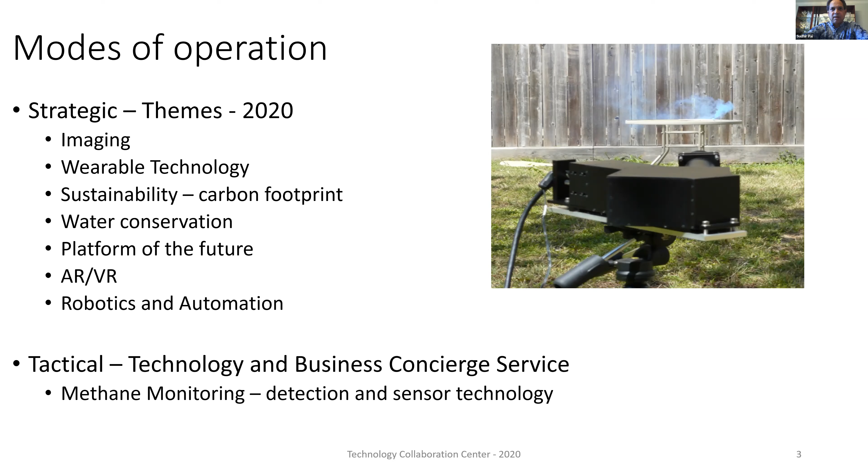I'll quickly zoom into the main point of today's discussion. A lot of the rest of my talk is going to focus more on robotics. I have two lovely colleagues following my talk, Jamey Jacob and Bob, whose talks focus more on robotics, aerial robotics and drones. So I won't steal their thunder, and I'll focus more on the other parts of robotics.

Here's something interesting about today's topic: history, where we are, and where we want to be. I looked it up, and interestingly, in a Forbes communication from July, they laid it out extremely beautifully, which made my life a little easier because I could reference some of it.

Since the term robot was coined around the 1920s, it has been there for centuries, depending on how you define the word robot, robotics, and automation. But the real big thing happened in 1920, when robots started to become an important part of our lives.

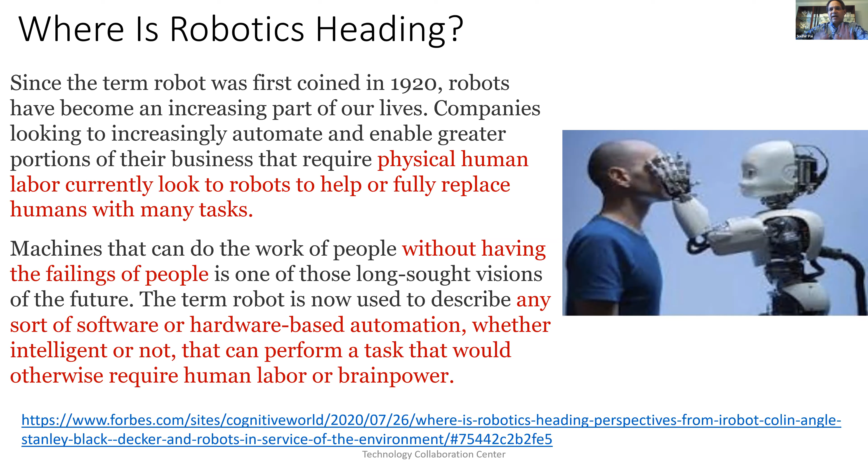But more and more these days, the term robot is used to describe any form of software or hardware-based automation, whether intelligent or not, that can perform a task that would otherwise require human labor or brain power. So very clear on that, and obviously there are lots of examples of this.

As we pivot into a new way of working, the timing for this talk is very apt. That's why when Susan reached out to me, I absolutely jumped onto this topic - not only is it interesting to me, but also because of the current pandemic and this new way of working, which to some extent has become a semi-permanent way of working.

When we came into this, we thought it would be weeks or months. Now, the more you go into it, it looks like it wouldn't be surprising if this continues this time next year or beyond, based on the success of the vaccines coming out, the antibody tests, etc., which prompted me to put up this slide.

So, new directions - physical robots are highly desired in many industries, especially to perform tasks often referred to as the 4 D's: dirty, dangerous, dear or expensive (where cost effectiveness is important), or dull or demeaning. Not to take human jobs away, but to move the need of a human being away from mundane work and diversify human talent to places where they're really needed, changing where there's a lot of turnover due to boredom.

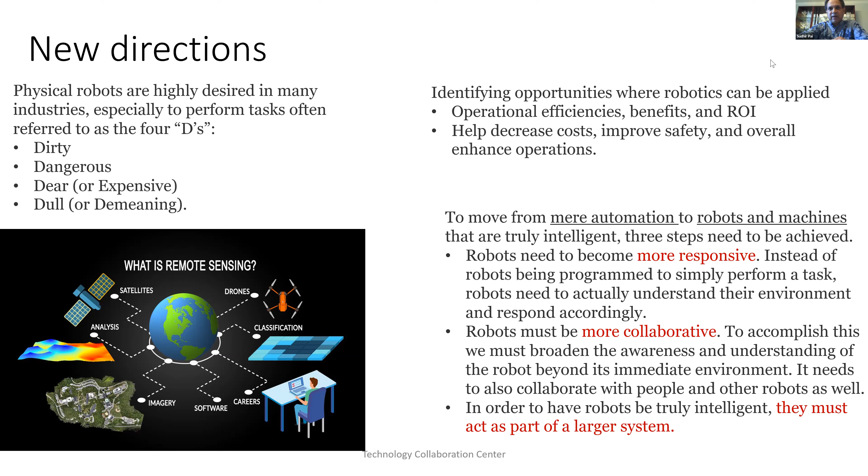Platform of the future is one of the themes that we are taking within the organization. Going to have a lot of the lessons learned from being able to do unmanned systems with the rover, which is going on Mars, and the ability for it to go shallow into the surface strata.

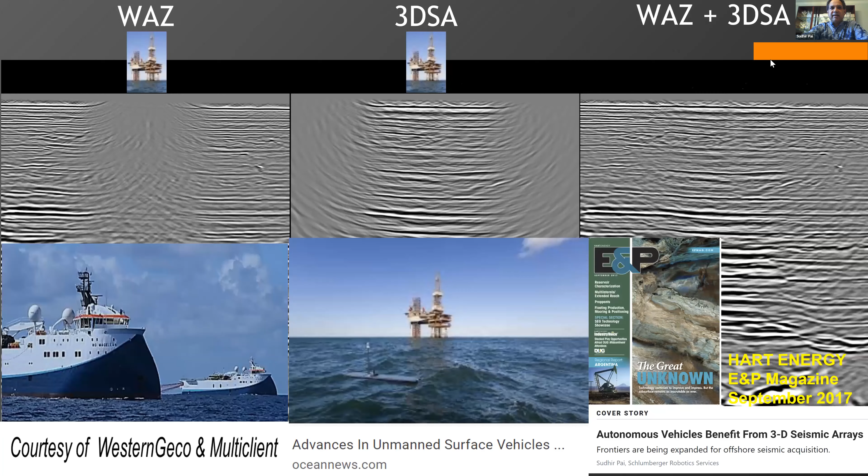And finally, like I had mentioned in this particular slide of the operator's vision... just hold on, let me turn this thing off. Okay, so.

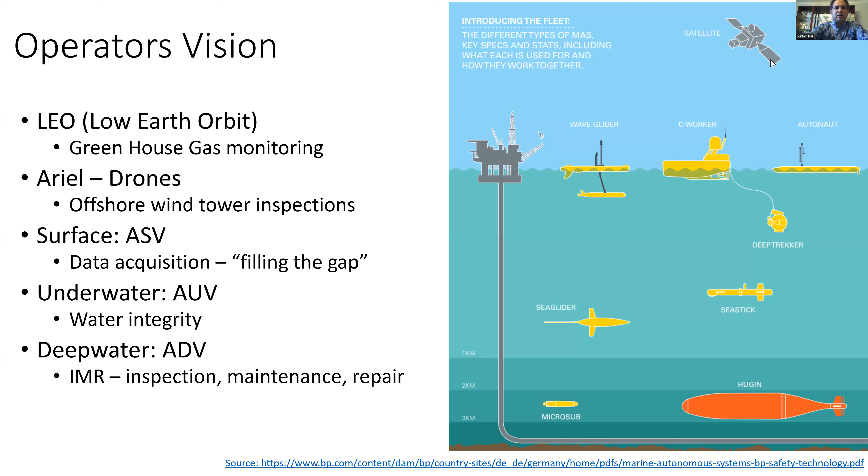Autonomous surface vehicle, I talked about data acquisition, filling the gap. So here is an example I want to put up, and understanding that in one of the previous talks I had done, the audience is not the same.

I thought let me repeat this slide in closing to show that the left slide is what you can acquire in a seismic survey using boats through a streamer survey. But then, if you are doing all of this stuff around a rig or an unmanned platform, then you obviously do not have the data, and you see that up here on the left side, wherein there is no data in the center.

But you can use robots, autonomous surface vehicles with seismic sensors attached to them, with the same source vessel providing the sound signal to the sensors which are on the outside of the zone, where you cannot enter if it's a streamer vessel, by putting sensors in that zone.

And then on the right side, you see it's almost like a carpet with a hole, and then you weave it with the same kind of resolution and accuracy to get a nice fabric layout. This is available in the Hart E&P magazine, and it was presented at OTC a couple of years ago.

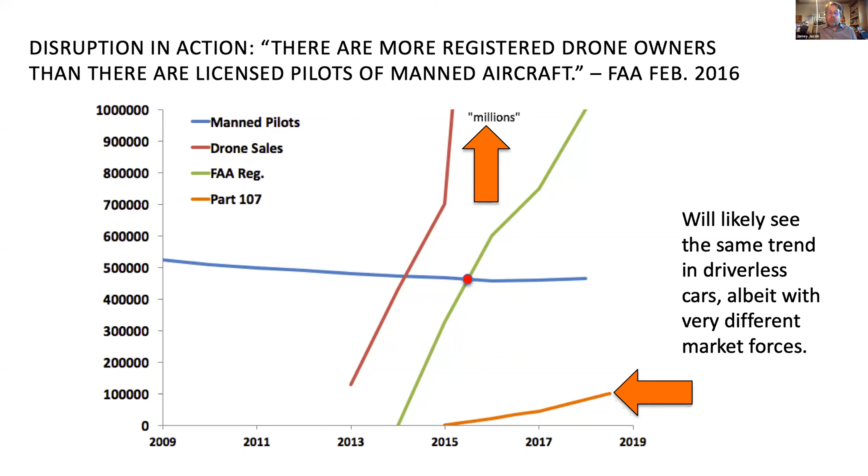So we're still seeing this growth right now in terms of the number of licensed, what we call Part 107 pilots. That's the portion of the FAA Federal Aviation Regulations that allows you to fly drones within the national airspace. Now, as I mentioned, there are lots of different form factors for these: fixed wings, rotary wings, and even within those subcategories, you see lots of different shapes and sizes of these systems, really dependent upon the type of application that you're looking for.

All drones really have one thing in common: they have to have some kind of payload, and that payload is really what we're interested in. We don't really care about the drone or the unmanned aircraft itself - that's just a method to get the payload where we want it to be. Whatever type of system that is, whether it's a chemical sensor or a visible or infrared camera, what we're interested in is being able to get that payload from point A to point B, have it take its measurements, and get that data back. So we tend to think about these really as data delivery systems, increasing your capability to get the data that you need.

And whenever I talk about drones, I always like to go back to the hype cycle. For those of you not familiar with this, it's used quite a bit in Silicon Valley to describe the life cycle of new technology and how that technology is introduced into the industry. We see a new idea, a new system, a new widget developed, and pretty quickly, people think it's going to be the greatest thing since sliced bread. Then reality sets in, and we go from the peak of inflated expectations all the way down into the valley of death, this trough of disillusionment where we think this will never work, never be useful in our particular industry.

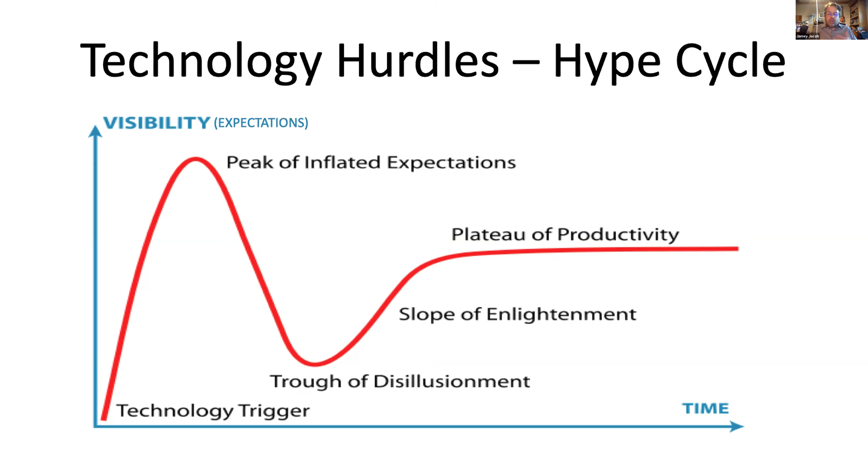Slowly, bit by bit, as you're getting feedback from those early adopters and users in the industry, developers are able to improve those systems to where finally we get to this plateau of productivity and these systems are finally useful. I always go back to things like the smartphone, because we're all very familiar with those. We can remember the issues we ran into with smartphones early in their lifetime, where even the iPhone had trouble making simple phone calls, and when Siri and voice recognition started to be developed, all the issues that you had with that. But it's just a continuous feedback cycle that allows you to finally get things working well enough that you can utilize them in the industry.

Now, these are tracked - the hype cycle isn't just a hypothetical construct. It's actually used in the industry to track all different types of new technology, including both unmanned ground vehicles and unmanned aircraft systems. Notice both of them have passed that peak, and now we're somewhere within that valley of death, that trough of disillusionment.

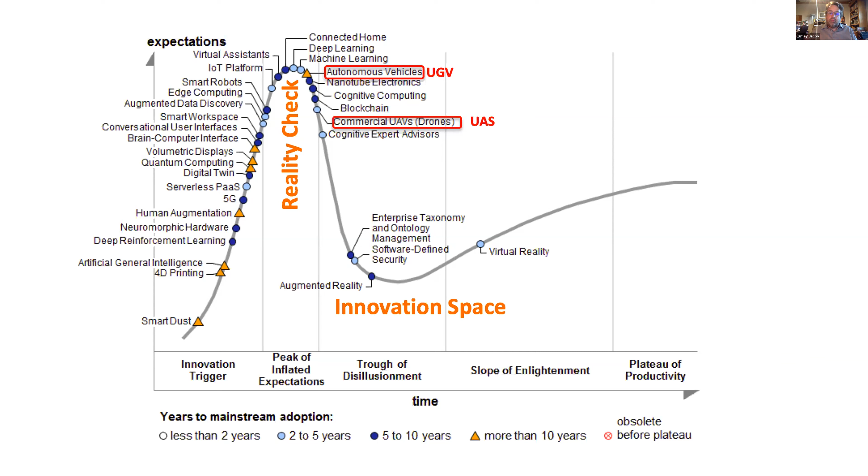One of the things we see ourselves doing, particularly at the Unmanned Systems Research Institute at OSU, is trying to build a bridge so that we can cross that trough as quickly as possible and get over to that plateau of productivity. To make these systems really practical and useful, new technology has to be implemented, developed, and tested to demonstrate that it's robust enough to get us to that point.

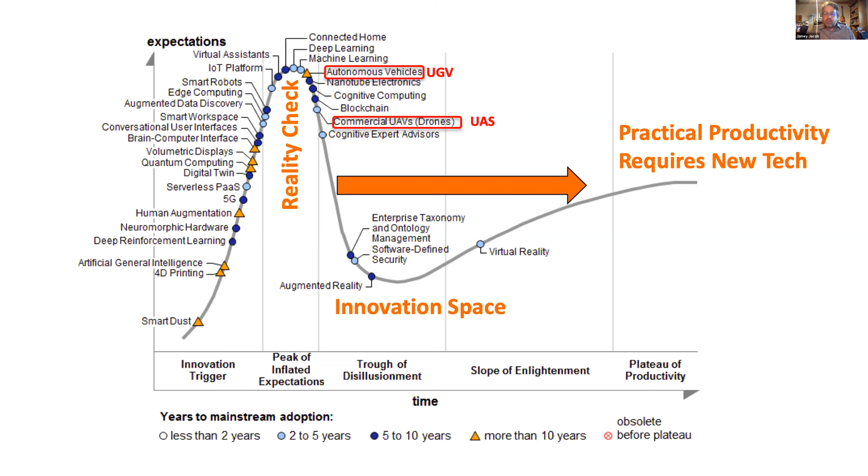Going back to that timeline, drones have only been around in the industry for about 5 years. It wasn't until 2016 that the FAA even had regulations in place to allow you to use drones in commercial applications. Prior to that, you could really only use them as a hobbyist or as a government entity, like a research organization. So it wasn't until 4 years ago that the FAA put the Part 107 regulations into place.

As part of that, they recognized the limitations are pretty onerous. 400 feet may sound like a lot, but when you're trying to do surveys and observations, it doesn't give you a lot of leeway. There are also requirements in terms of operating a single drone and maintaining visual line of sight with it, which limits its usefulness in terms of how far away you can fly, and also how many vehicles you can operate at one time.

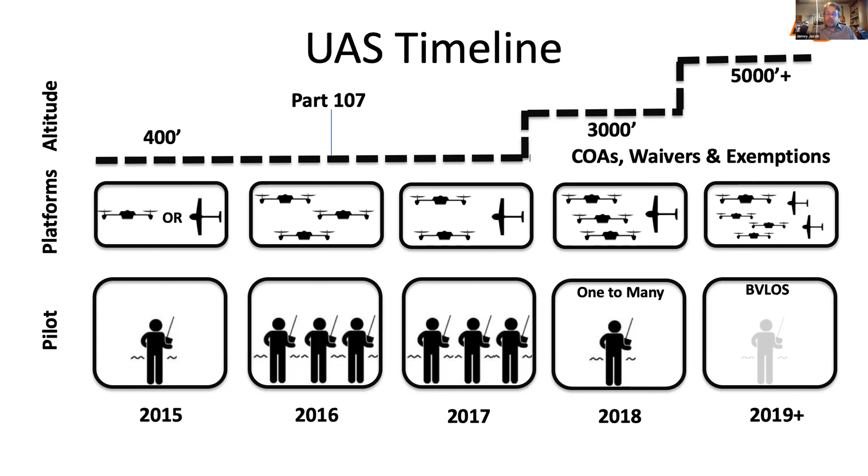They recognized there were going to be new technological developments that would allow these new modalities to be used. So they developed a system of waivers and exemptions that allow people to apply. The ones I'll primarily be talking about are the one-to-many or swarming, and what we call BVLOS, or beyond visual line of sight.

Going back to our UAS airspace operations, under the Part 107 rules, we're required to fly the vehicle in Class G airspace up to about 400 feet. It's not for the safety of the drone or the drone pilot—it's really for the safety of other aircraft in the area, particularly manned aircraft, because there isn't currently a requirement that manned aircraft be able to see drones in all different applications. So there has to be a way to deconflict the two vehicles in what we call non-cooperative airspace.

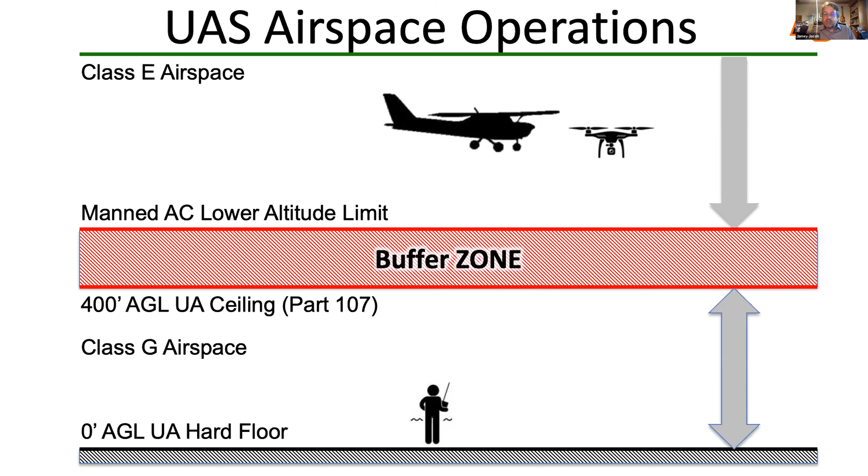That way the manned aircraft can be flying over, and you can be operating your drone at some safe distance below that. What we want to avoid is people flying drones too high, becoming a safety hazard for that manned aircraft.

This is our current paradigm right now—flying the vehicles, whether they're rotary wing or fixed wing. We're flying them out, operating them—here's our really fancy animation showing the vehicle flying over and doing its job, inspecting whatever we want to inspect, or searching for new sources of energy.

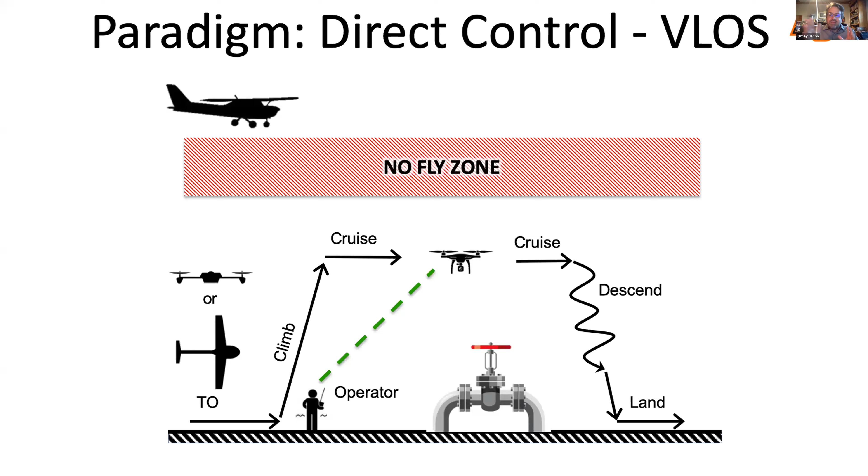The requirements are that we maintain visual line of sight, that the operator has to be able to see that drone. It's not really that the FAA cares that you can see the drone—what they care about is that the pilot has the ability to see other aircraft that may come upon that airspace, so that if you see another vehicle flying in, you can land that drone very quickly. So maintaining line of sight is the most important piece of that.

That takes us to the next useful piece we want to implement, which is beyond visual line of sight. That allows us to fly the vehicle beyond the visual capability for the pilot to see it. It could just be a matter of distance—you're flying really far away, so you can no longer see it because it's very small, or you're flying over a building, over a mountain, whatever it may be.

There are a lot of pieces we have to fix to make sure things are working, primarily communication, since it's radio communication between the control system that the pilot has and the drone. We have to make sure that communication link is not only robust, but also secure, so your data is not being stolen.

And there are ways that you can use that over 4G or 5G networks, or even satellite links to be able to do that.

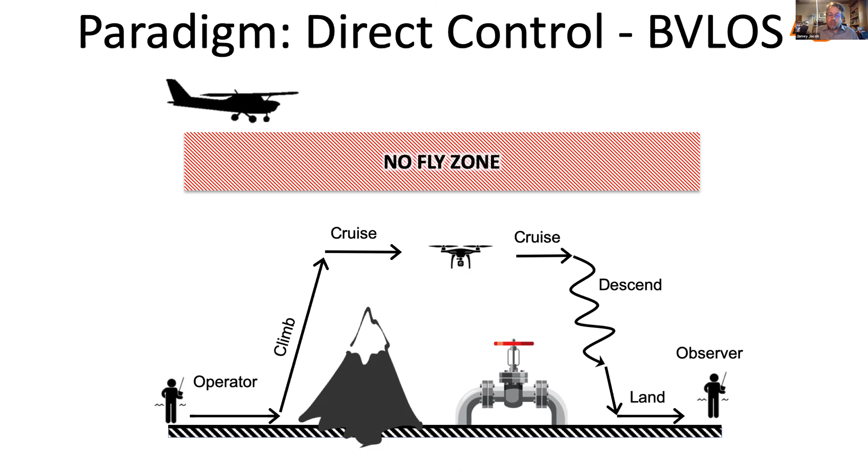Now, to make that requirement happen, we've been involved in a lot of beyond visual line of sight development and testing. We have a beyond visual line of sight corridor at our flight field, which allows us to do limited testing. It's less than 20 miles long, but that's long enough for us to demonstrate the technologies that allow the vehicles to navigate safely within the airspace.

Essentially, what we have to do is have the computer on board the aircraft be able to see the environment around it. That may be using visual systems such as cameras, or radars that allow it to map the surrounding area. Then, just like a real pilot in a manned aircraft, if it sees another aircraft in the area, it needs to be able to develop a maneuver to properly avoid that aircraft.

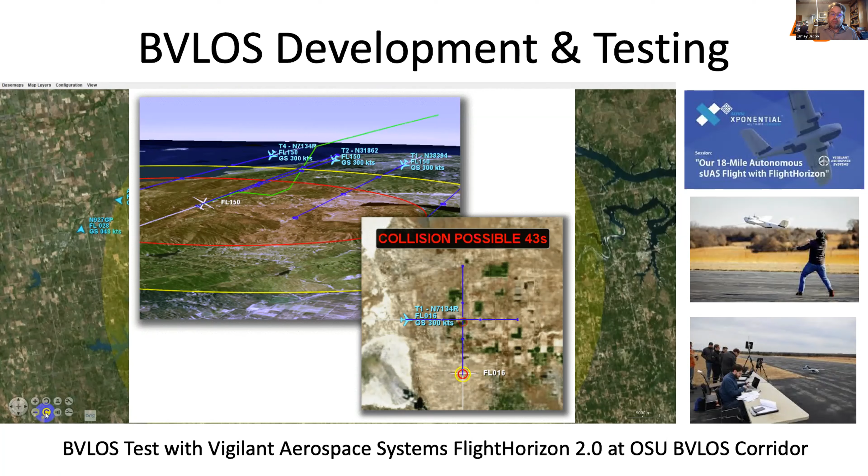Now, the next piece we're working on is full autonomy, and when I say we, I mean the entire industry. This allows you to take the pilot out of the loop of having to do minute-to-minute navigation of the aircraft. So now you can be in your base of operations, and again, all you care about is the data. You push a button, the vehicle goes out, flies its mission, and is able to maintain safe separation between it and other potential aircraft in the area.

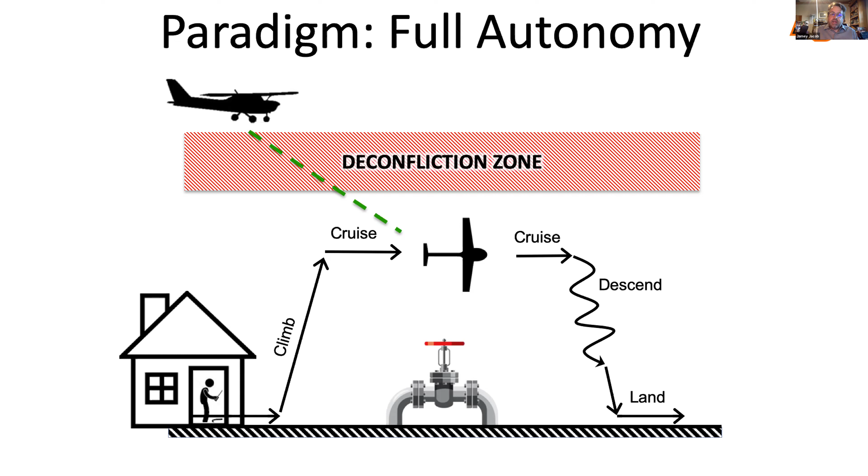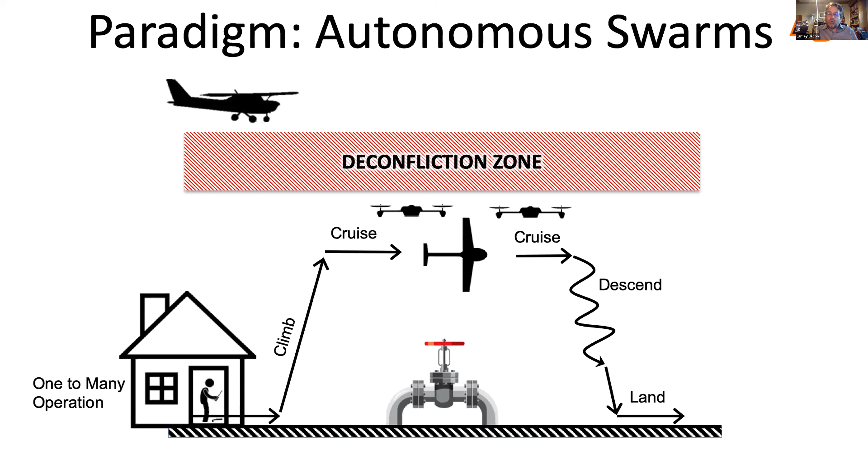So once we have that piece, it allows us to do the next stage, which is autonomous swarms. Because the aircraft can see other aircraft in the area and operate autonomously, instead of just operating one aircraft per pilot, you can have one pilot operate many aircraft. And that allows you to do lots of things.

So there's an example here in the video off to the left. You'll see two fixed wing aircraft flying a maneuver, turning in coordination with one another. What one aircraft is doing in this case is leading—it has a flight path that it's following—and then the other aircraft is following behind it, making sure that it maintains a safe distance and separation.

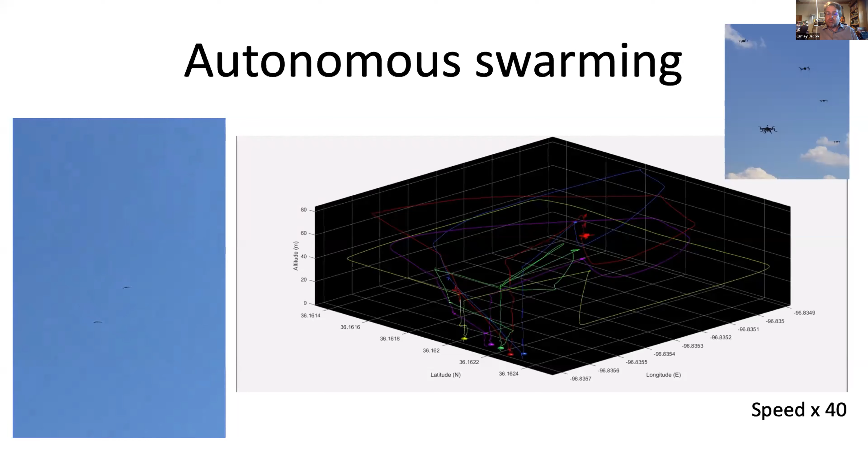Now the final piece for this is to get to the point where we have an unmanned traffic management capability. This requires a lot more coordination with communication systems and the capability for vehicles to not only navigate and plan their path, but also coordinate with other vehicles in the area by letting all other aircraft and potential vehicles know what their plans are.

So this is where I'm flying right now, and this is where I plan to be. Are there going to be other obstacles if I'm going to be 5 miles down the road, 5 minutes from now, that I have to worry about?

So you can think about this really as smart traffic and smart planning, mapping everything out with literally the cloud. You send your flight plan, and then you're automatically approved by an autonomous air traffic control system that says you now have the right of way to go through and fly through that area.

And so this is the piece that the FAA is working on right now—really segmenting different ways that drone operators will be able to remotely identify their aircraft, so you know what the aircraft is doing, and then having that aircraft file a flight plan autonomously, and have that system approved through a computer-controlled flight path management system.

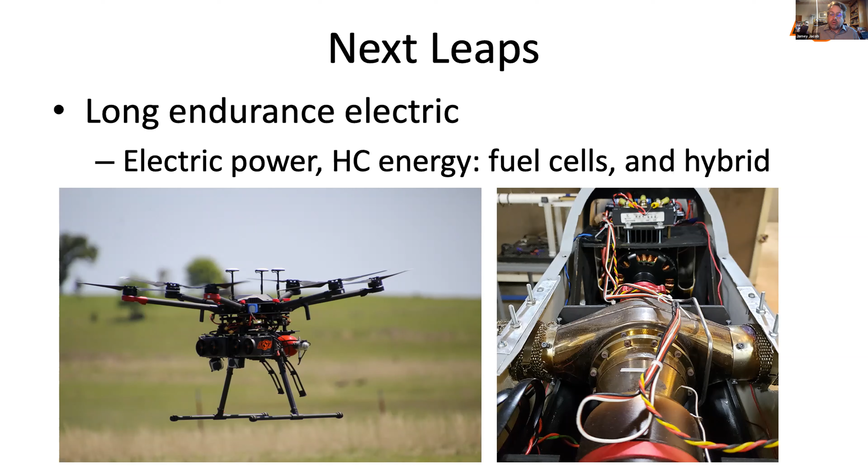Now, what this will finally let us get to is implement other pieces of technology which are in development now, but aren't really useful until we have these beyond visual line of sight and unmanned traffic management capabilities in place, such as flying really long endurance electric aircraft. So all the benefits of flying electric aircraft system, but instead of the really low energy density batteries that we're limited to, using hydrocarbon energy to tap into that chemical energy potential to give us much better improvement in efficiency.

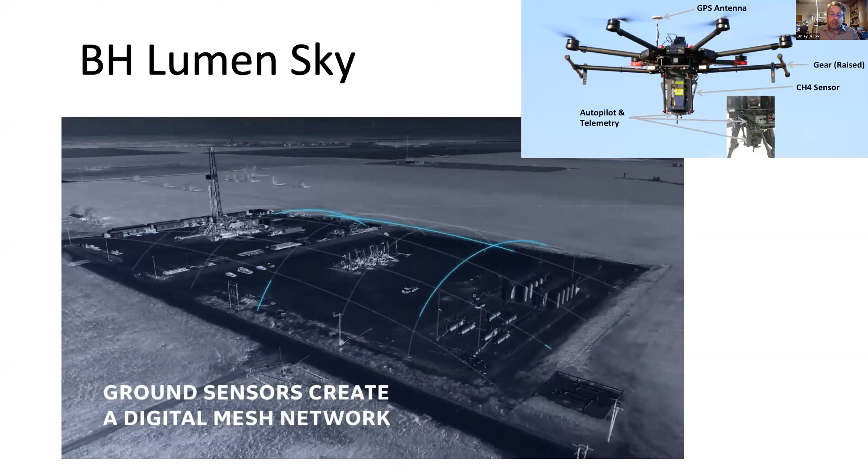This allows us to do long range inspection, particularly of things such as pipelines, power lines, and really starting to use these things for their full capability for things such as exploration. I'll end here with a piece we've been working on with first GE and then Baker Hughes on their methane inspection system. This is just their ad that they put together to really provide this capability where you're able to take the systems out, put sensors on board that allow you to see things you normally can't see with the naked eye, such as methane leaks, and then send that information back to the operators to provide them with actionable data they can use to have a better handle on what's going on within their operations.

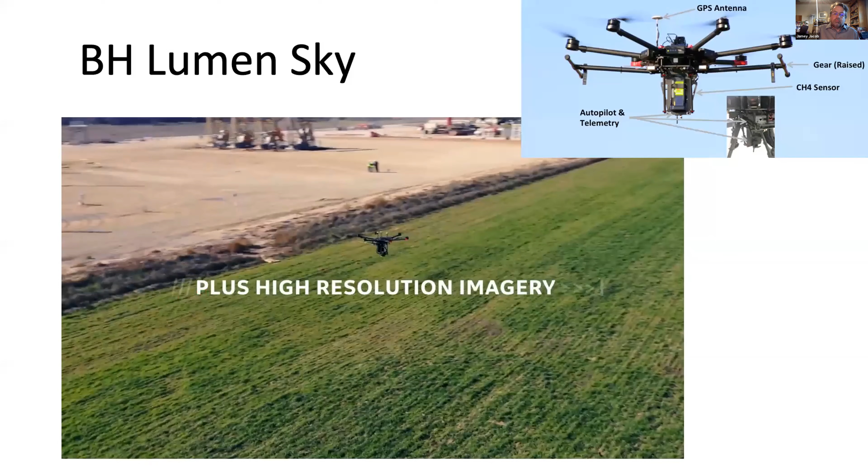Oh, that's great. Over to you, Susan. Yeah, and I just have one quick question, because I know we'll have more time for more questions. I'm sure a lot of people are wondering. So on the sensor, for example, if it's a FLIR infrared, how do you detect the leaks or spills? Do you use vegetation and hyperspectral, or what?

Well, you can use all of the above, right? Okay, so particularly with the imaging sensors, primarily you're looking at certain wavelengths, and whether those wavelengths are being absorbed by that particular element or molecule you're looking at, or whether they're being emitted, you use that sensor to its best advantage. So it really just depends upon the details.

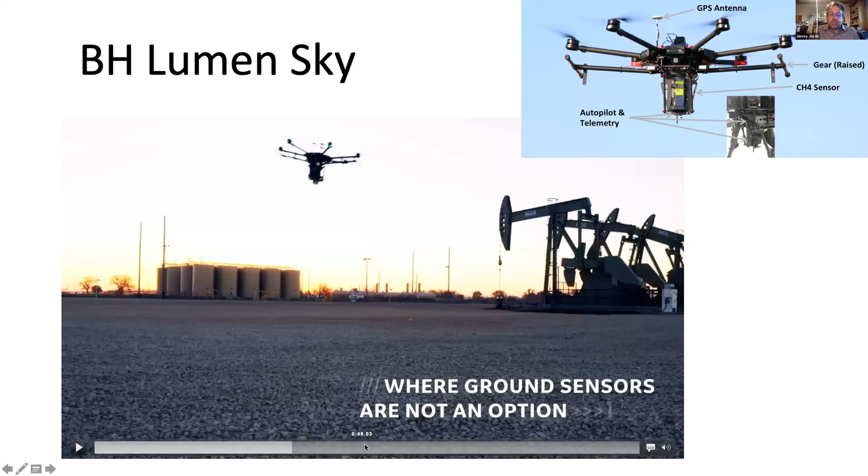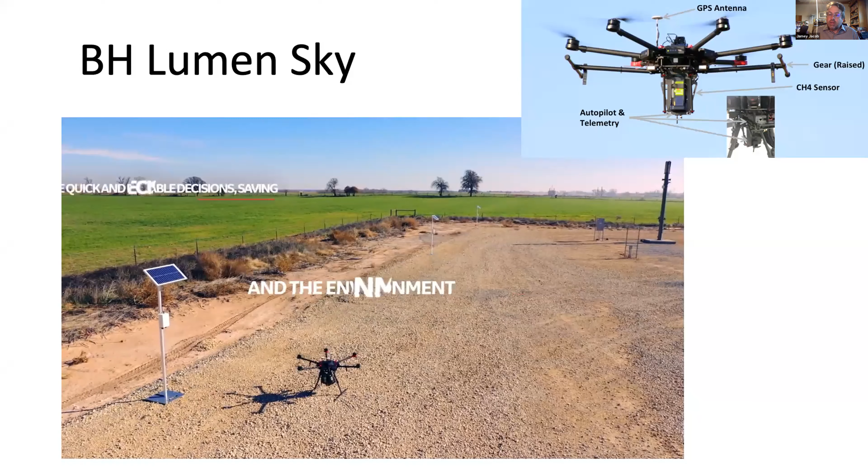So it's a mixture, kind of all the above. The non-dispersive infrared sensor, for example, that's being used here, and I think there's some examples of this provided within later portions of this video, is really looking at blocked portions of the wavelength where methane doesn't allow light to transmit. So you can use a particular wavelength being emitted from the sensor, and based upon how much of that wavelength is returned, how much of the energy is returned, you can determine what the concentration of methane is. But that's just one example.

And I guess also you can still use vegetation as a proxy. Correct, yes. Yeah, that's interesting. I mean, it's not an immediate detection, but it could be good for saltwater spills or something like that. Yeah, using things such as the NDVI system that's used to actually detect crop health, you can use that as a proxy to determine what other sources are within the particular environment you're looking at.

It's really interesting, especially when you consider the use for precision agriculture. Was it Blue River that, when it was bought out by John Deere, started using that quite a bit? Yeah, and again, we're going to see a marriage of this through a number of different industries. Precision agriculture is really focused on ground vehicles right now, but you're just starting to see a much greater use of aerial systems in precision agriculture. It's just so interesting because you save so much in terms of water and fertilizer and all that by doing the precision work. Anyway, thank you very much. This is so great.

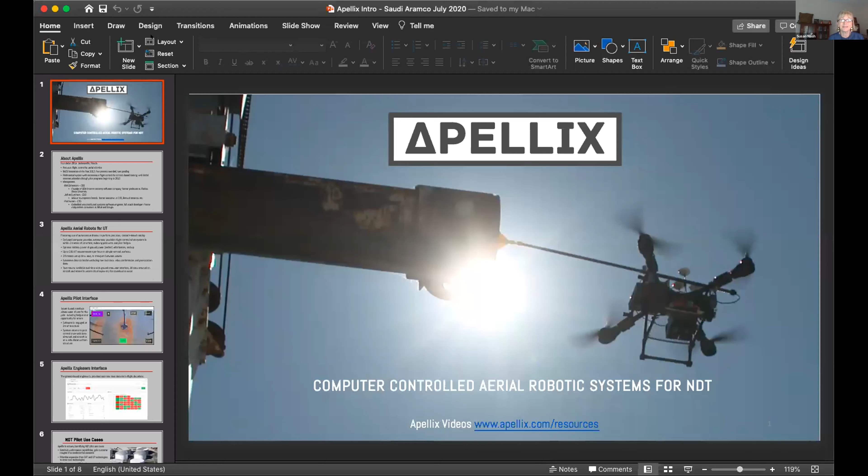Really appreciate it. Oh, you're welcome. So our next presenter is Bob Dahlstrom, and I'm really excited that he's here. He first got involved with AAPG's UPitch 2 years ago in Houston. It was really great because at that point, Apellix was at more of a startup stage. And now you're at like probably level 4 or 5. At any rate, it's really, really glad that you're here and really interested in how you've evolved. Thank you. Thank you. Well, we're getting there. It wasn't that long ago, you're correct, that we were a startup. I guess we're sort of an emerging technology company at this point. But going back to Sudhir's comment about silos and the tool that you need maybe in your neighbor's toolbox, that's what's great about these presentations that you're putting together. That's what's great about even something like a robot and a drone and putting those together.

So if you notice on this slide, what you see is a drone, it's up there flying, but what else do you see? A robotic arm on there, and at the end of that arm is a hand that's physically making contact with the surface. So the hand is called an end effector. So what we've done at Apellix is we've taken and married the two together and created what we call an aerial robotic system.

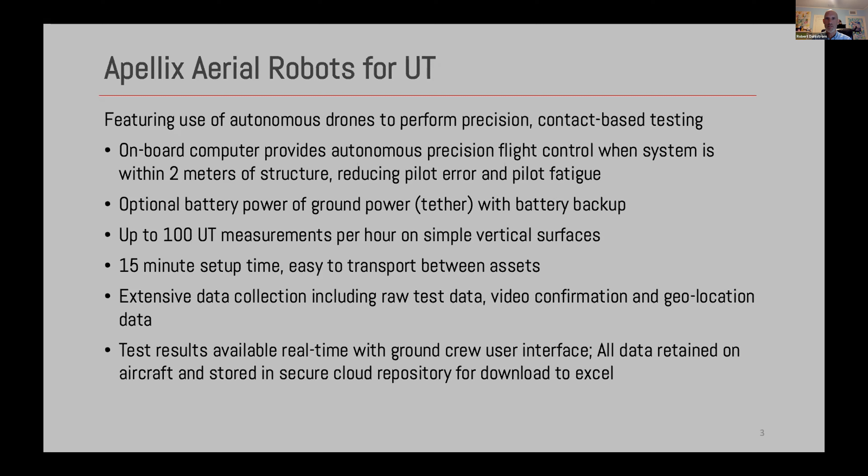This is what I want people to keep in mind if they're thinking about starting businesses themselves, or how to use drones or robotics to tackle problems within the industry: you need to look at something that improves the current process, something that maybe lowers cost or does a better job. Like in our case, we're able to collect more data than a person could collect. And then also, safety. Safety is a big issue, so having something that's a safer process is very, very good.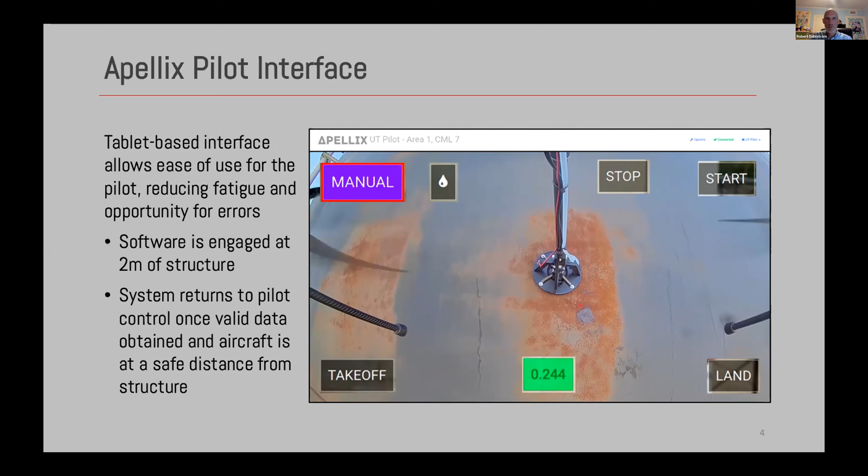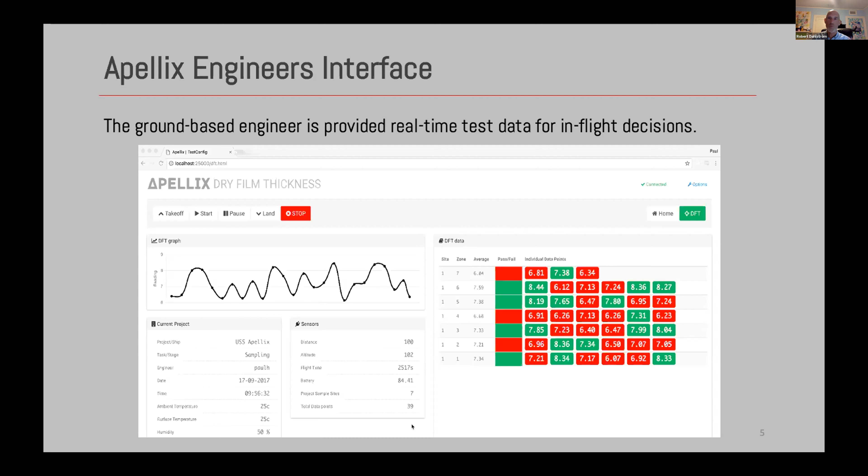And also just gather more data, because a drone is nothing but a computer, and a computer is a data gathering machine. So we collect a lot more information than having a person do the job, just like you would with agriculture with the thermal cameras that can see what the human eye can't.

So we have pilot projects that we're working on now with various companies. I'm happy to announce that as of today, we have our first flight of one of our new products coming out, which is a soft wash drone. That's a chemical washing system that's high volume, low pressure—about 1200 PSI, and I think 8 to 10 gallons per minute.

And this is designed for use in elevated water towers, 150-foot water towers that have mold that builds up on the outside of them. So the system had its first test flight today and flew well, but also we found some things that need to be changed. So we'll be fixing those and moving that on.

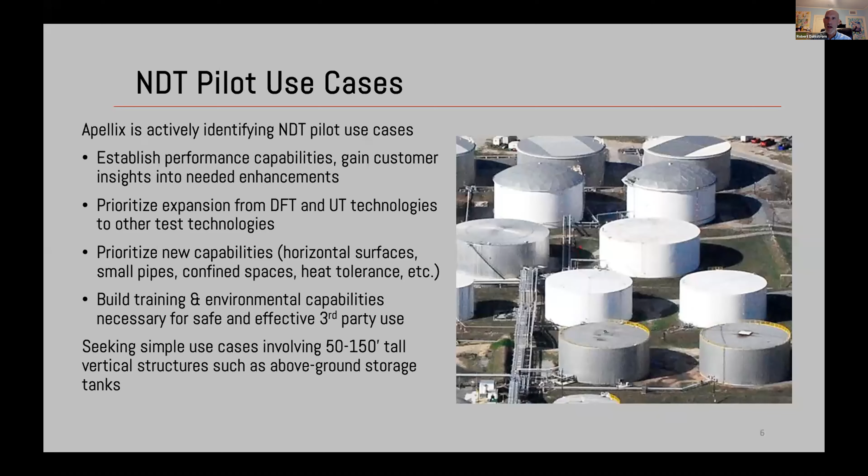But so we have this, and the reason I bring this up is we have this objective as a company—we play in the corrosion space, and that's why we're interested in AAPG and oil and gas. We want to take an asset when it's new, an offshore oil rig or whatever it might be, and be able to coat it with or paint it with our drones.

So we're under development for a spray painting drone with Akzo Nobel International Paints, which is one of the largest paint companies in the world. We're about 9 months into a 24-month development cycle with that, making some very, very good progress.

But we want to be able to take a new asset, coat it when it's new, clean it as it needs cleaning, measure it over time, maybe blast some paint off when it needs to be repainted in certain areas, repaint those areas, and when the whole thing needs repaint, repaint the entire thing. So that's part of our objective as a company—the whole life cycle asset management.

And we feel that we've been lucky enough to come up with a platform that is able to change the world. Again, if we're able to remove people from elevation and have them focused more on the higher use of their skills, that's a good thing. If we're able to apply coatings without a person having to be there, that's a good thing.

If we're able to gather data, and this may be the most important of all, that's data we can feed into the digital twin to help make better decisions on the underlying performance or life cycle of that asset. Standards like SSPC PA2 for dry film thickness, or API 653 for ultrasonic thickness testing of wall thickness, were written for people on these structures taking these measurements manually. If it takes all day to get 20 measurements versus a drone getting 800 or 1,000 measurements in a day, you can change that statistical sampling and end up with a better understanding of the condition of the underlying asset. That's where the value of the data starts coming in.